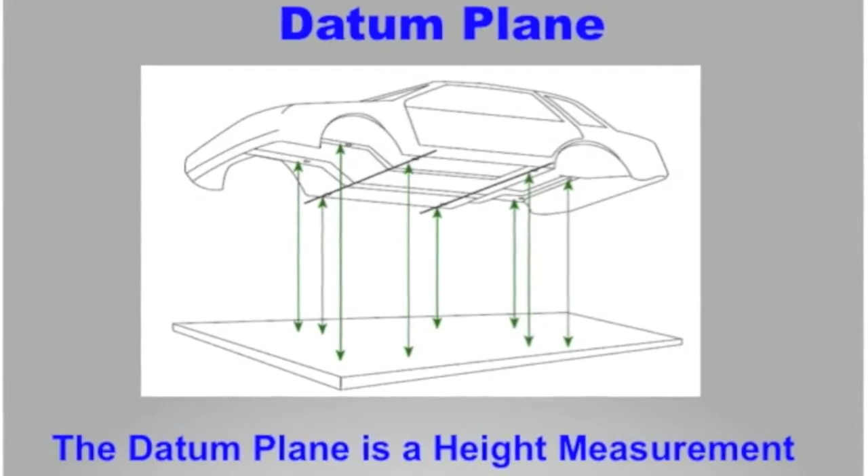Some of the things here - I won't spend too much time on it - but datum is the measurement of your height. Center plane measures your width, and the zero plane measures your length. We'll talk about dimensions and tolerances a little later, but it's plus or minus 3 on most vehicles today, some are 0.

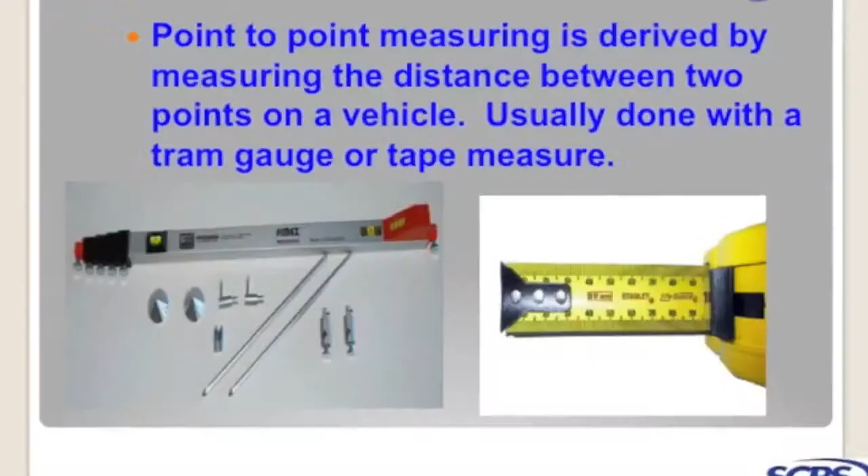So point-to-point measurements - this is where we use a tram gauge, go between two points, and just measure the length. We can only measure two direct dimensions, either length or width. We cannot measure height with a tram gauge or a tape measure.

So these would be point-to-point measurements - we just go across and measure them. Some of the things that create a problem for us is that a lot of things aren't in a straight line, so we have a bit of a problem. We also have a lot of things in the engine compartment, especially where most of this would take place, that give us somewhat different readings.

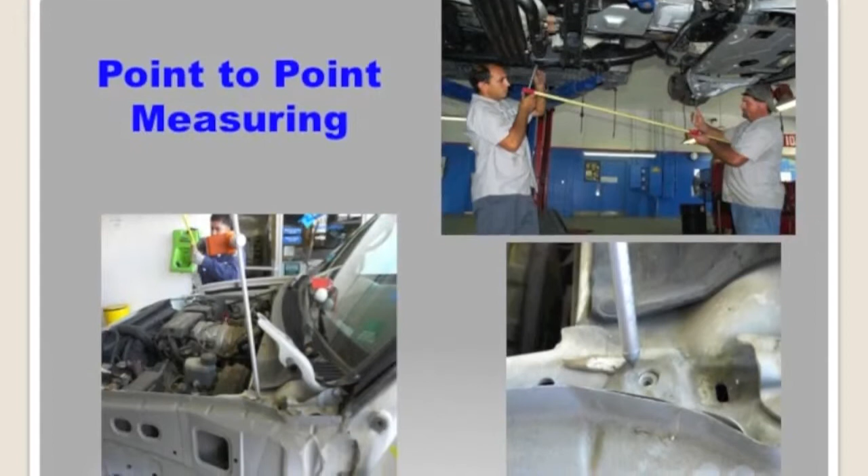Here's some point-to-point measurements. Again, you can see on spot one where this car is actually swayed over a little bit. So this would come up on a point-to-point measurement. What we needed was some way of doing three-dimensional measurements, so we started looking at three-dimensional systems.

A couple things about wheel alignments. If you view a car from the front and look at the tilt inward or outward, that's your camber. If you turn to the side and look at a wheel going from front to back, that's your caster. Very important to understand these things.

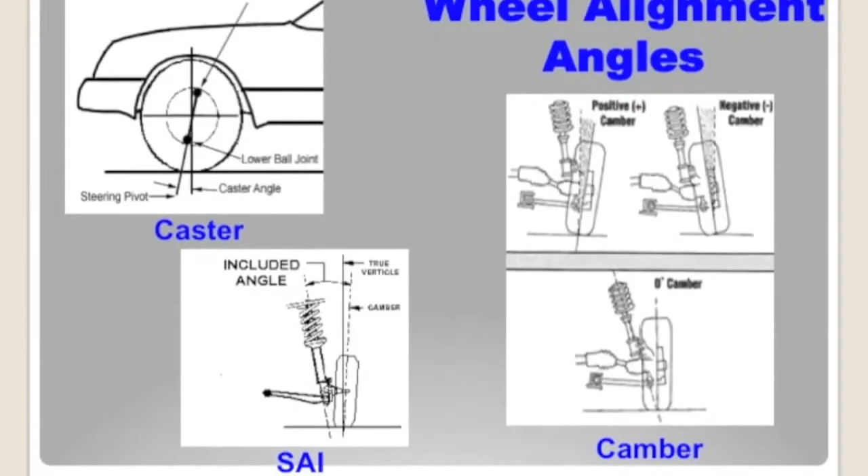I was in Hawaii with Dale, and we had this 2011 Honda on a global jig, and we were measuring the vehicle just to show you some of the damage here.

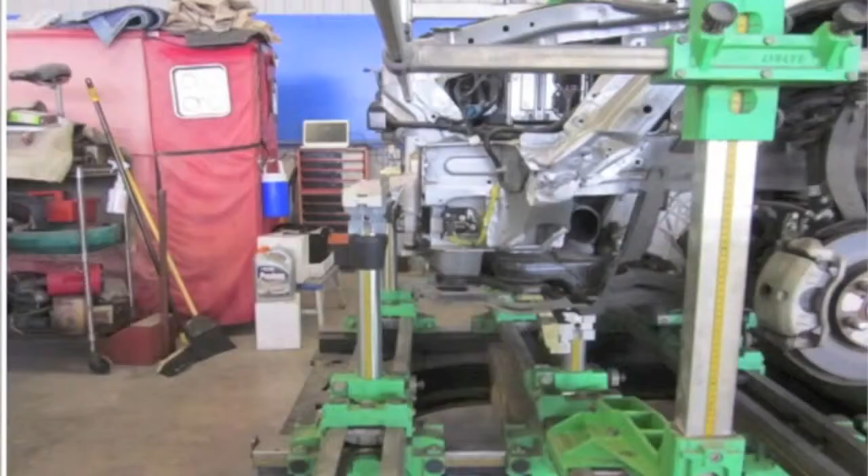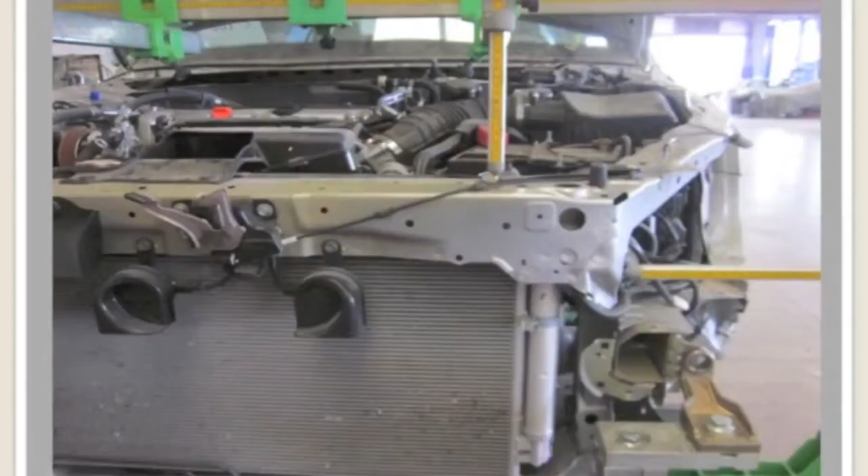We had an 8mm mash, which means we were 8 millimeters short on the length. The width had swayed over inward by 25 millimeters. So you can see here was the damage.

This would only have been available with this type of machine, to see exactly where it was. So we measured some more, another dimension here from the top. You can see where the damage is - this car is swayed over to one side.

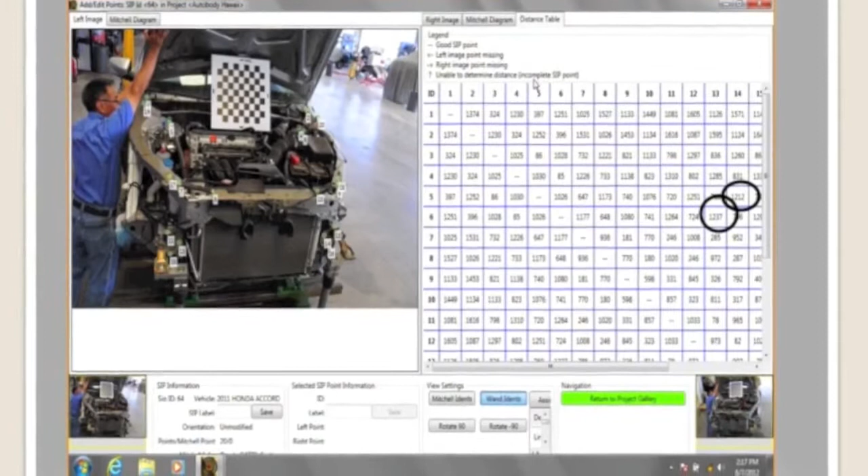Remember, point-to-points were 2 upper points. We went from an upper strut tower bolt to a frame rail. Look at the difference - how are you going to do that with a tape measure or a tram gauge? It's impossible. But in the photograph, it's able to do this. So, they pulled the car.

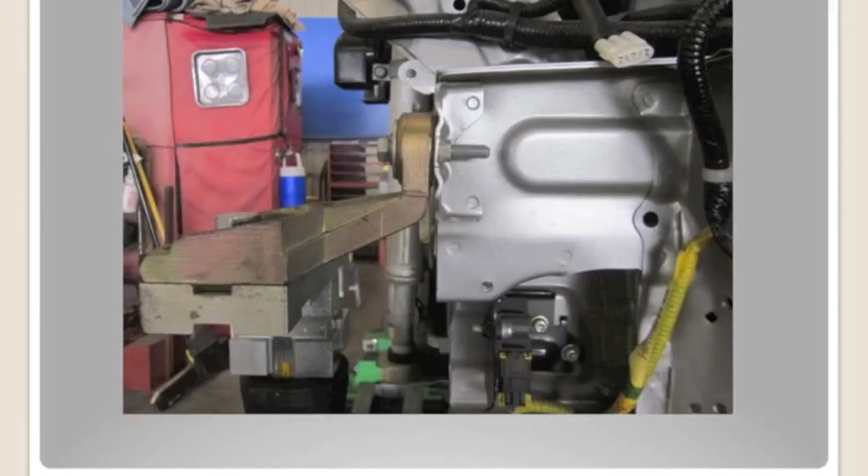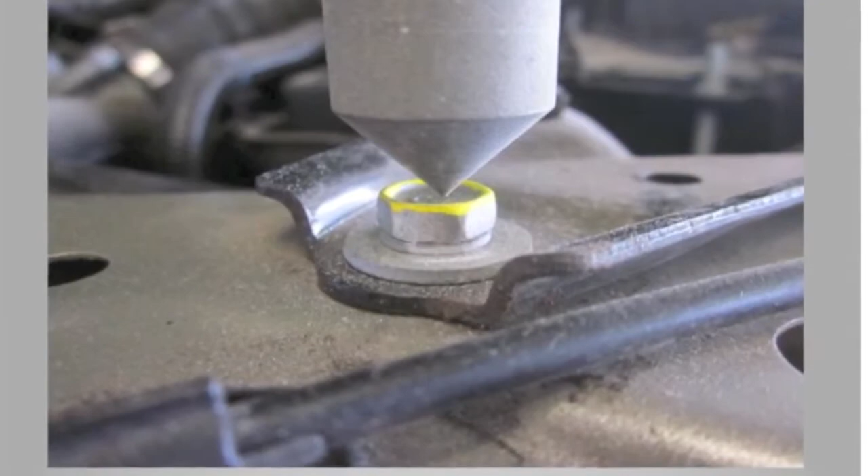You can see everything's lined up. Yep. So we're back to original specifications. And look at this, 758 and 758. Just 2 dimensions. Car straight. Photograph. Next.

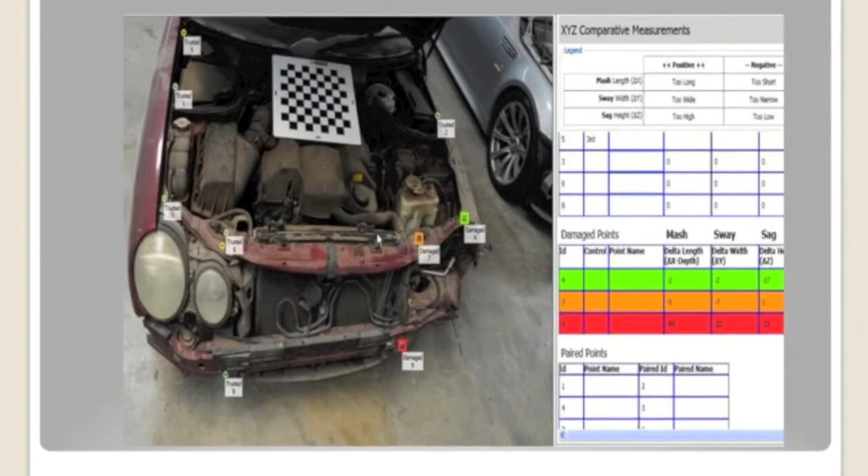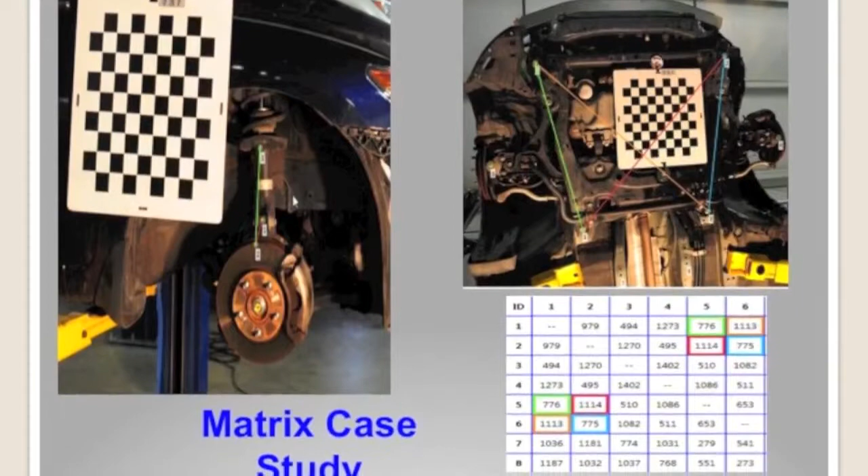Again, these are some of the matrix studies. Not just two-dimensionality. We have the ability to take this machine and convert it over to where we have three-dimensionality. So we can measure length, width, and height with a photograph now. Next. We can go underneath the car. We can measure suspension. We can measure cross members. We can measure movement of the cross members.

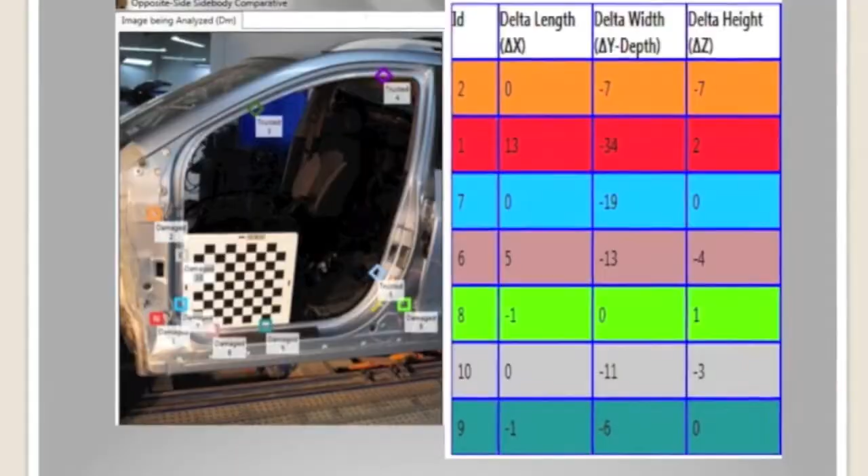Next. Some more pictures. We can measure door openings. We can measure the B pillars moving in and out, which, again, with these new metals and energy transfer of all this ultra-high strength steels, unless you're literally measuring those cars, you don't know how much movement has occurred. That's why it's so important to measure these vehicles prior to starting working on them. But we don't do that as an industry. We're going to have to change it, ladies and gentlemen.

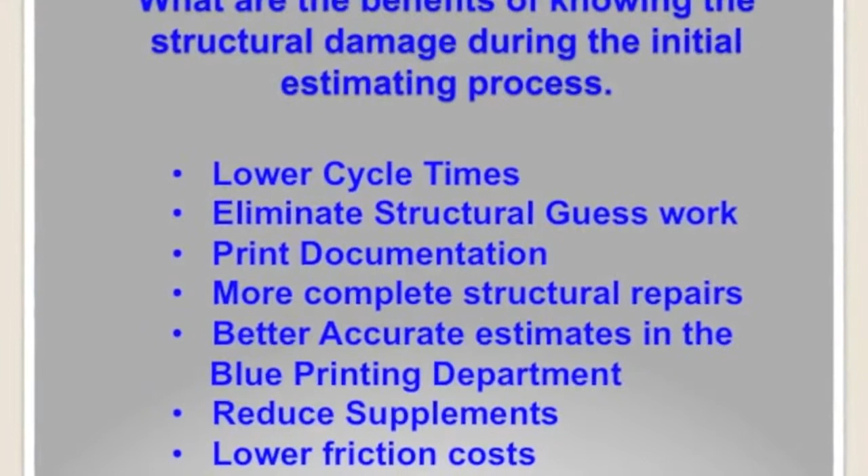Next. So here are some of the dimensions where, as you can see, we talked about the width. You can see where the damage has occurred. Next. Where is this done? This is not to replace a measuring system. Understand that. This is a supplement to a measuring system. This is where we do it in the blueprint. Gives us that information up front prior to us working on the vehicles.

If we have this information up front, we can write a more accurate estimate. We can start to stop these people running back and forth. We know exactly where that damage is. And it's done with a photograph. And again, you can watch how it's actually done. But you can see, it eliminates the structural guesswork. We get printed documentation, more complete structural repairs, more accurate estimates in the blueprint, reduced supplements, lower friction costs. All of these things with a photograph.

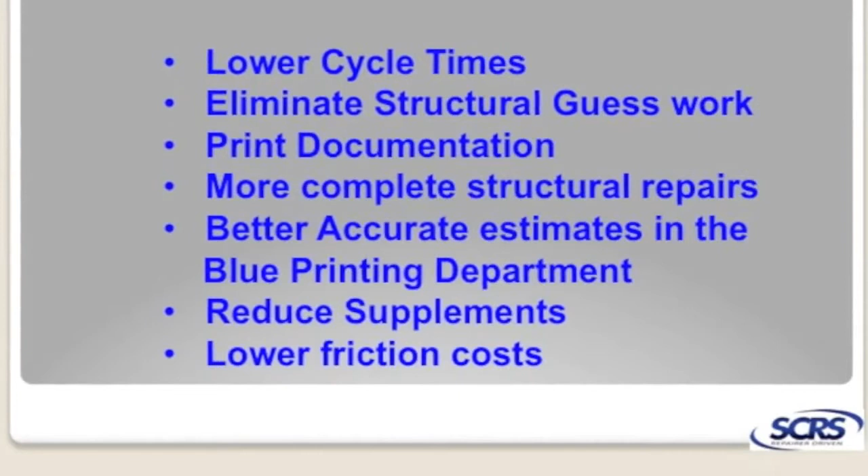Can I make a point there? How often do you see the car come into the store and you look at it and say, that ought to be worth 2 hours, or 12 hours, or whatever it takes to pull? To find out later when you begin the repair process that, oops, it was a little more than what you anticipated. Some of us are going to go back to the carrier. Some of us are going to accept it and, hey, it's what it is. Get it done. This eliminates that. Literally, you take the time to perform this in your upfront blueprinting process.

It's done. You've got the data, and the carriers that have come into our store, they've embraced it. It's a terrific tool. It shows them no ifs, ands, or buts where we are from a structural standpoint. Like I said, it's more of a comparative measuring type tool, but it's enough to give us an opportunity right there up front to see what it's going to take to repair it.

And then predictive wheel alignments. How often, you're in that last day, you got everything ready, and now you go test drive the car and you feel that little pull. And now you got to call the wheel alignment place, or hopefully get in line with your wheel alignment machine, or whatever the scenario is. You catch it up front. Do a predictive wheel alignment analysis on it, and you have it. And there isn't a question as to, well, are you sure? Well, yeah, here's the data.

So anyway, it's an incredible tool to use specifically when you're really trying to get into that blueprinting process. If you really want to get the negotiated process up front, and take care of the days that you're going to lose by not having all this data up front, this is a tool to do it. A couple final notes: this can be done anywhere in your facility. It doesn't have to be in the body shop, it can be out in front of the store, as long as you have a place where you can photograph it.